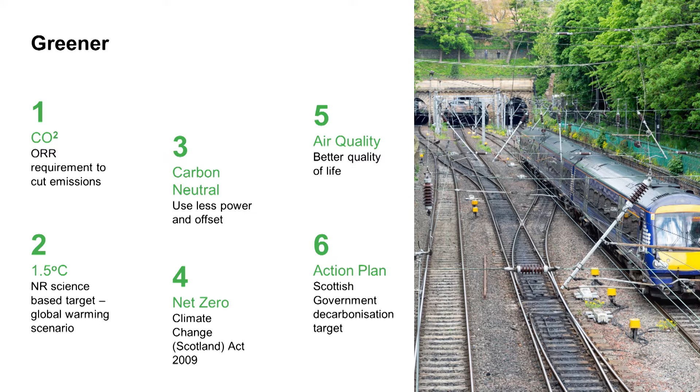The reduction in emissions of greenhouse gases isn't just important for the climate emergency, it also provides us all with cleaner air in our towns and cities, which is a very, very tangible benefit of improved health and well-being for all of us. In Scotland, we've got local legislation backed up by the Transport Scotland Rail Services Decarbonisation Action Plan, published in 2020, and it demonstrates the understanding that an electrified railway is the best solution to using less power.

So it's for these reasons of first principles that I absolutely agree that the electrification of Scotland's railway is the best way for the railway to play its part in averting the climate emergency.

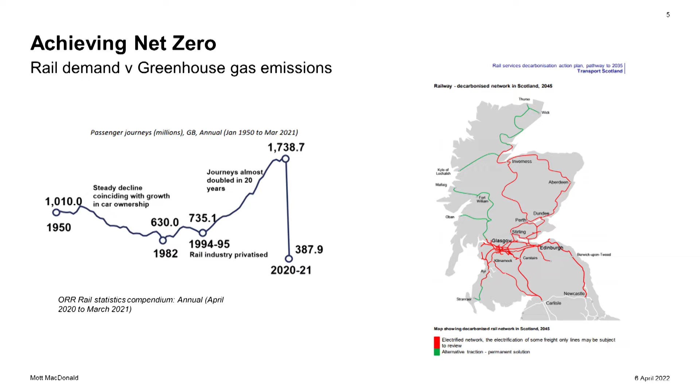Rail use will continue to grow as the modal shift takes hold that we talked about this morning, and we also start to recover and continue to recover from the COVID pandemic. In order to reduce greenhouse gas emissions at the same time as rail use increases, we need to do more for less. So we need to think about the railway as an entire system, not just the engineering that goes into construction, but the holistic rail system, the rolling stock and the timetable.

This is why vertical integration of track and train under a single guiding mind is so important. The long-term vision for Transport Scotland is to use electrification for the vast majority of services, with only the most remote and infrequently used lines making use of alternate traction, as Bill discussed this morning. As we're still at the early stages of development of hydrogen and battery trains with bimodes to facilitate decarbonisation in the short to medium term, this appears realistic, but if we again turn to science, we can demonstrate that even bimode trains will never be as effective as pure electric trains.

If we consider how far each train can get on a kilowatt of energy, we start to understand the long-term benefits of electrification from an entire rail system carbon cost perspective.

Starting with hydrogen, this is an energy-hungry fuel to produce. The argument is that we generate green hydrogen, but that green electricity could be used far more efficiently in other ways. And we have the challenge of fuel tank size. Hydrogen fuel tanks need to be significantly larger than the equivalent diesel tanks, and this takes up valuable seating capacity on a train, and currently technology makes it unviable for heavy freight trains. By limiting the fuel tank to an economic scale, this limits the range of the rolling stock, and we get into a spiral with the laws of physics in terms of additional weight to carry more passengers and travel further.

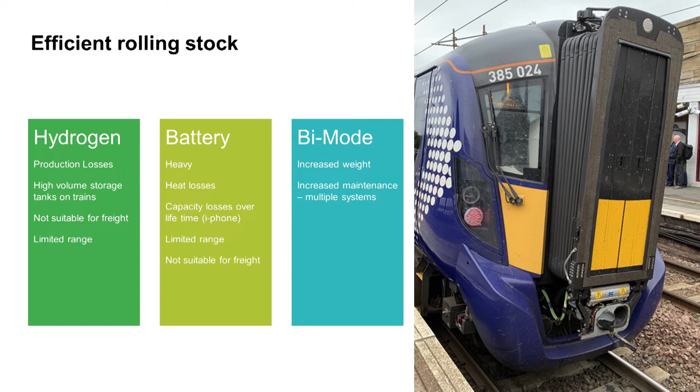Now we get to bimodes, the Holy Grail, the answer to all our prayers, or are they? Are they the best of both worlds, or are they an unhealthy compromise that eats more power than is necessary? The upside of bimodes is the avoidance of uneconomical overhead line, which is a short-term win in terms of capital cost of installation, but is it the best for the planet? The major challenge with any bimode train is delivering the same performance as an electric train, but with the added weight of the onboard power source, which in addition, for most of its life, is being dragged around under wires, doing nothing but wasting precious energy. I can see James Watt turning in his grave.

So in the short term, it's economic to use bimodes as the country is connected, and this is why I like Transport Scotland's long-term vision for using bimodes as an interim solution.

If we look graphically at how we use a kilowatt of green electricity, ignoring transmission losses and keeping this very simple, we can assume that a pure electric train converts 100% of its power into traction at the wheels and achieves 100% of the distance.

Comparing this with hydrogen, and not getting hung up on actual percentages, we see losses occur in production, in transportation, and in the engine. Consequently, the percentage of that kilowatt left to move the train is quite low.

With a pure battery train, we would incur some loss in charging and then discharging the battery, but the bigger challenge is the extra weight. Not only do the batteries take up space, which means less seat for passengers, but the additional tons of dead weight need to be carried around and dragged up hills, all of which uses power that's not then available for traction.

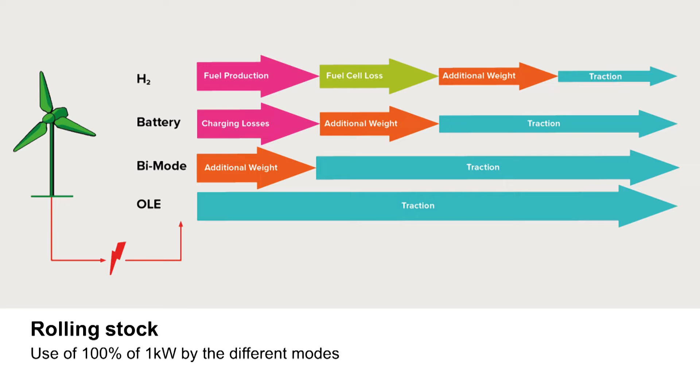It stands to good reason that science-based targets should follow the evidence and move towards full overhead electrification. The only exception to this would be where, for a long return period, say 50 years, the embedded carbon cost of electrification would require such significant alterations to infrastructure that the added traction benefit is outweighed by the impact of construction. Typically this will be in areas with low frequency, low occupancy trains. So again, I have to say, I think Transport Scotland's map for the long term gets this absolutely right.

So having made the revelation that overhead electrification is the best answer, what else can we do to decarbonise the railway? Well, the next couple of slides analyses some of the data we produced for the Borders line electrification between Edinburgh and Tweedbank, using our train performance modelling software.

This wasn't actually in our brief, but the modelling software and the graphical outputs helped us to identify an opportunity. If we start by looking at the terrain, we all know that you need to do more work and use more power to push a train up a hill. And this slide shows the gradient profile of the Borders line.

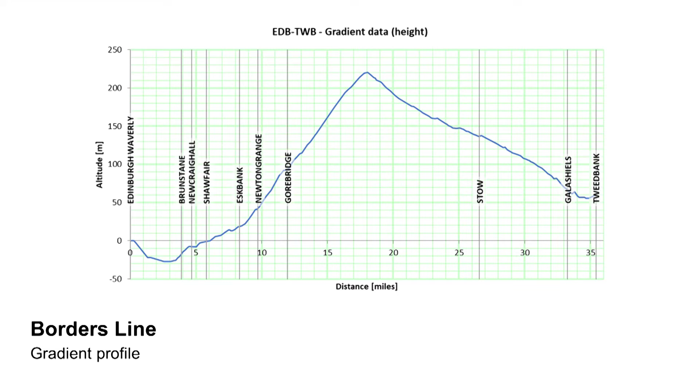What we can then do is look at the train performance, the acceleration and the braking, within the permissible speed on the line, to examine journey times. And on here, the blue line is the train performance and the orange is the permissible speed.

Generally the two align well, but you can spot a wasted opportunity where the red circle is, between Eskbank and Gorebridge, where potential savings could be made by reducing the permissible speed to 60 miles an hour with no impact on journey time. This could reduce the maintenance on the track and bridges, reducing the cost of maintaining a higher speed than is actually achievable.

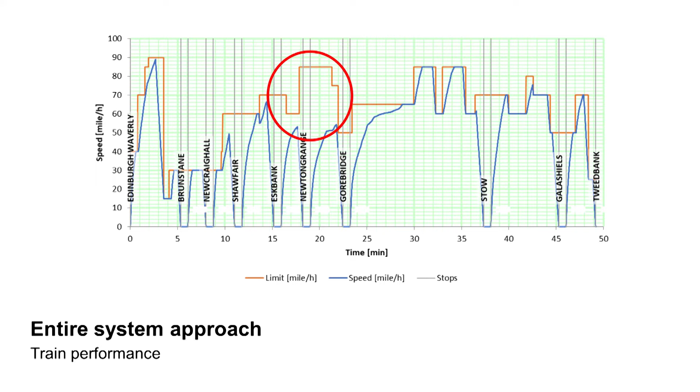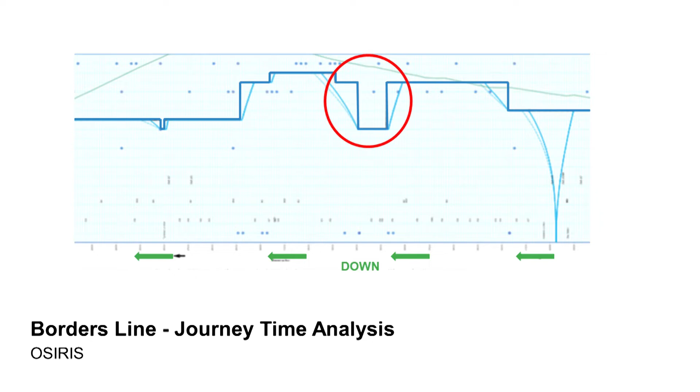How much power has just been wasted? Regardless of the traction type, whether it's batteries, hydrogen, OLE, diesel, or even steam, the increased power demand for doing that comes at an energy cost. If we upgraded the bridge, we could remove that speed restriction, and every train for the next 120 odd years would use less energy to get up that hill.

And this is how we at Mott MacDonald can think differently to make the entire rail system greener and bring health benefits to the nation. So we've seen an example of how to make the entire rail system greener and bring health benefits to the nation by doing so. How do we rise to the challenge of cheaper and faster?

Remember Mott's Law: funding is the product of vision and politics. We'll only achieve the funding for the green vision if we win over the hearts and minds of the politicians. So as an industry, we need to deliver cheaper and faster. But how do we do that?

Well, as designers, we have control over material quantities. We can bring in recent innovations such as static frequency converters, which could reduce the cost of linking the railway to the national grid supply, and this could be of particular benefit in some of the more remote parts of Scotland.

But again, Scotland are ahead of the game here. There's a long-term plan, it's written, the sequence is well thought through, and the final supply layout is built up in a logical manner. In terms of bridges, a few speakers have talked about this already today.

We've seen a lot of challenge from industry around electrical clearances, and touch wood, these are now relatively well understood, I hope. As engineers, our teams can use data captured by the new measurement train to check electrical gauge clearance for a variety of different scenarios in a matter of seconds.

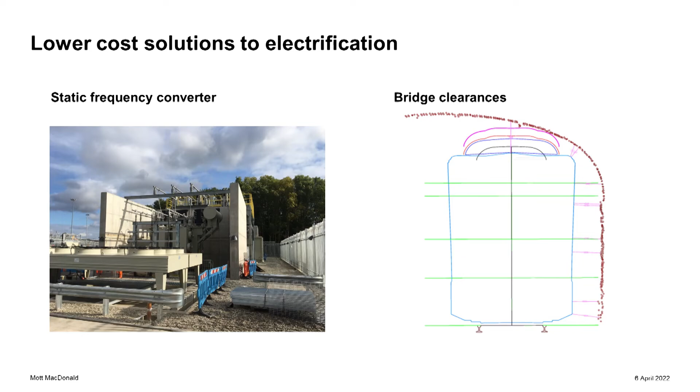A new approach to managing public safety allows us to significantly reduce the scope of parapet works required as well. By challenging design norms and historically accepted rules, as Gary talked about, we can optimise designs to reduce material quantities required. Less material means less to construct, less embedded carbon, and less cost.

The challenge is to identify the minimum viable product needed to meet the project aims, and that way the true infrastructure cost of electrification can be measured, and that will allow us to bring down the STK value. As designers, it's essential that we collaborate and drive down the scope and volume of material needed to electrify a stretch of line.

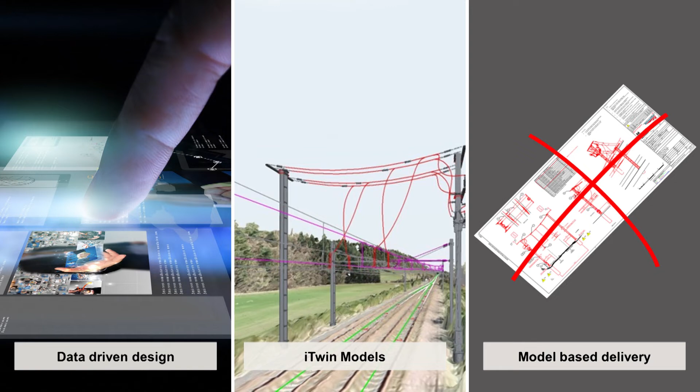We all know that time is money, so it's only logical that faster and cheaper are joined at the hip. We've recently reviewed our OLE design process at Mott MacDonald to see how we can support the drive for efficient electrification by being faster and cheaper as designers.

On our current projects in Scotland, we're using data-driven design, new types of survey data, and iTwin models to not only reduce the cost of our designs, but to increase the production rate while focusing on quality. An increase in design quality should result in faster and more efficient construction and a better end product for our overall client, rail passengers.

Data-driven design allows us to harness the power of the computers that we all use to design from first principles. Generic and simplified design charts and lookups are replaced with software tools that allow us to optimize wire run lengths, span lengths, mast heights, foundation depths, and other aspects of the design.

Design automation allows us to produce our designs efficiently and react quickly when change occurs, and this enables us also to update our designs in real time to include as-built data while construction is in progress. By automating the repetitive, boring parts of the design, we can focus the design attention on the more complex parts.

This allows us to optimize the most important aspects of a scheme and add engineering value as we design. We're using LIDAR survey data and ContextCapture survey data captured from drones and helicopters to reduce survey costs and times, and improve safety by dramatically reducing track access required for surveys.

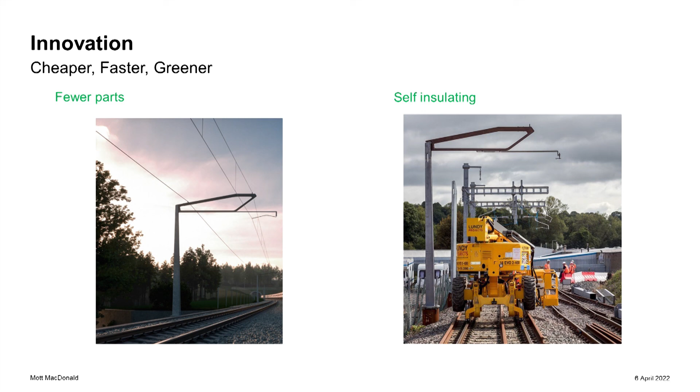If you haven't seen it already, I've got a 1:5 scale model outside on our stand, so I encourage you to have a quick look. The structure's lightweight, contains less steel, 74% less embedded carbon than any system currently available. It's got 70% fewer parts, which makes it faster to install and cheaper and safer to maintain. Most of all, visually, it's less intrusive, which is particularly important in the beautiful green countryside of Scotland.

So, to sum up, let's work together to bring about the next evolution in the railway industry, and let's deliver electrification faster, cheaper, and greener. Thank you.